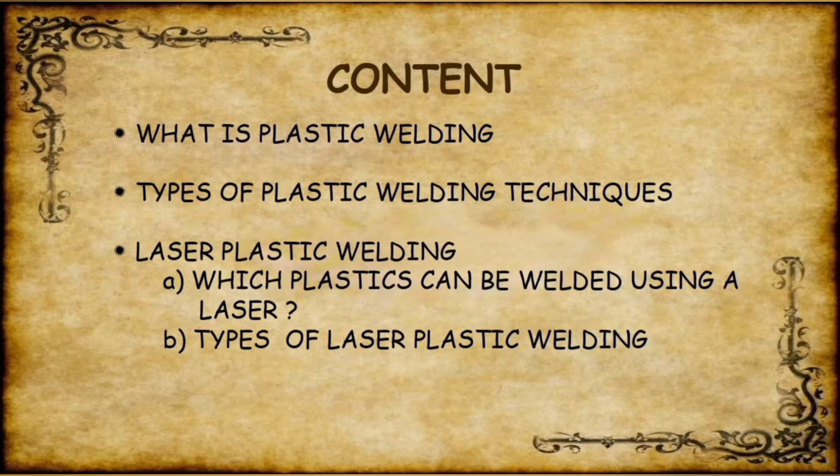Hi, I'm Nitin. Today we'll be learning about the application of lasers in plastic welding. We'll be going through what plastic welding is, types of plastic welding techniques, and we'll be concentrating on laser plastic welding, which type of plastic can be welded using a laser, and the types of laser plastic welding.

What is plastic welding? Plastic welding is a process of creating a molecular bond between two compatible thermoplastics. Welding offers superior strength and reduces cycle time. In plastic welding, heat is applied through convection of the pincher tip instead of conduction.

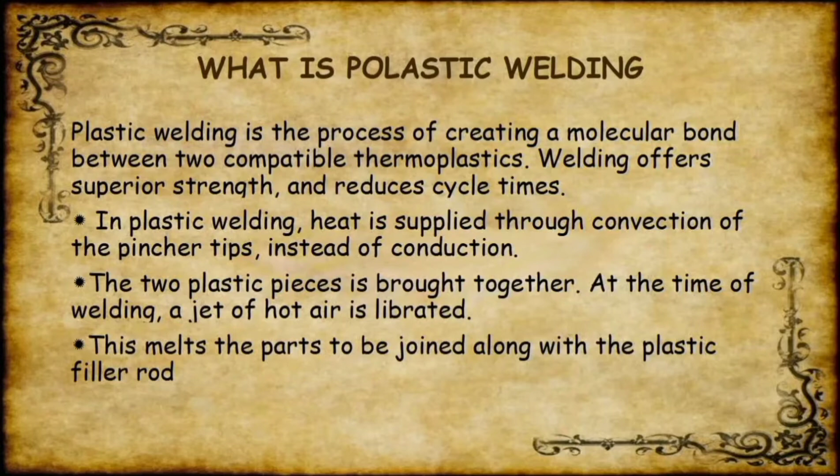The two plastic pieces are brought together at the time of welding. A jet of hot air is liberated. This melts the part to be joined along with the plastic filler rod. There are three main steps to any weld: pressing, heating, and cooling.

Plastic welding processes are primarily differentiated by their heating methods. The application of force and allowance for cooling are mechanical considerations, which may vary from machine to machine within the general process category. There are several methods of plastic welding.

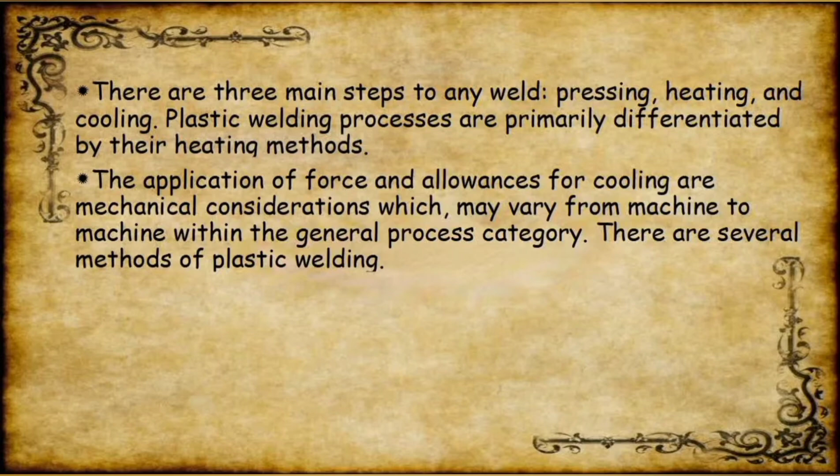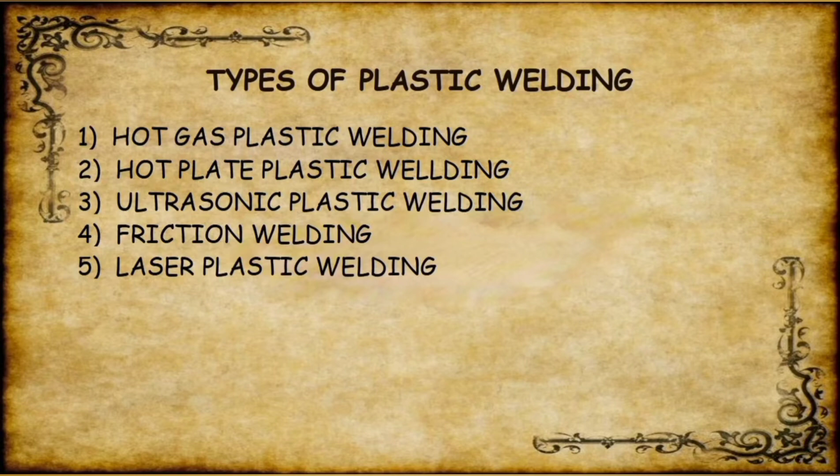Now, the types of plastic welding: hot gas plastic welding, hot plate plastic welding, ultrasonic plastic welding, friction plastic welding, and laser plastic welding. Now we'll see what laser plastic welding is.

When laser welding plastics using the transmission welding method, two types of thermoplastics are joined with one another. The laser passes through the transparent mating part, and the absorbing mating part is heated. The absorbing plastic melts the transparent joining area.

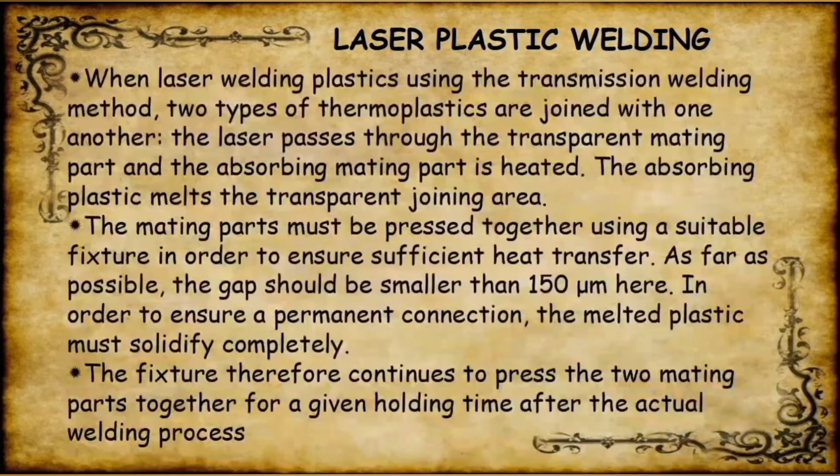The mating parts must be pressed together using a suitable fixture in order to ensure sufficient heat is transferred. As far as possible, the gap should be smaller than 150 μm here. In order to ensure a permanent connection, the melted plastic must solidify completely. The fixture therefore continues to press the two mating parts together for a given holding time after the actual welding process.

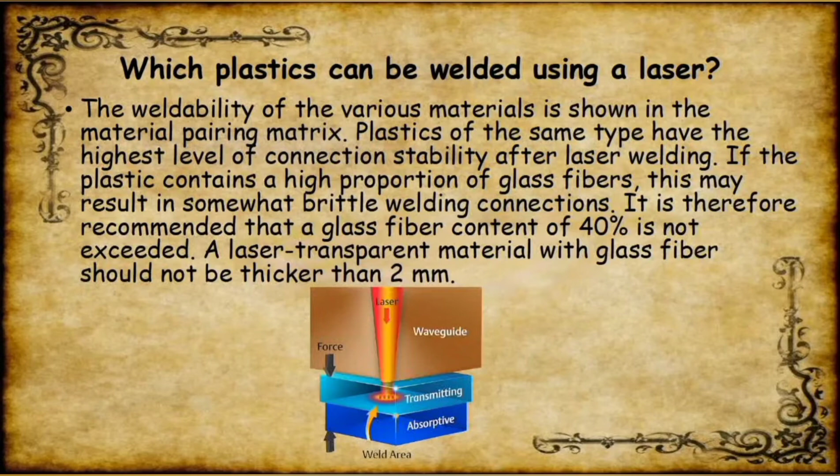Which plastic can be welded using a laser? The weldability of the various materials is shown in the material pairing matrix. Plastics of the same type have the highest level of connection stability after laser welding. If the plastic contains a high proportion of glass fiber, this may result in a somewhat brittle welding connection. It is therefore recommended that a glass fiber content of 40% is not exceeded. A laser transparent material with glass fiber should not be thicker than 2 mm.

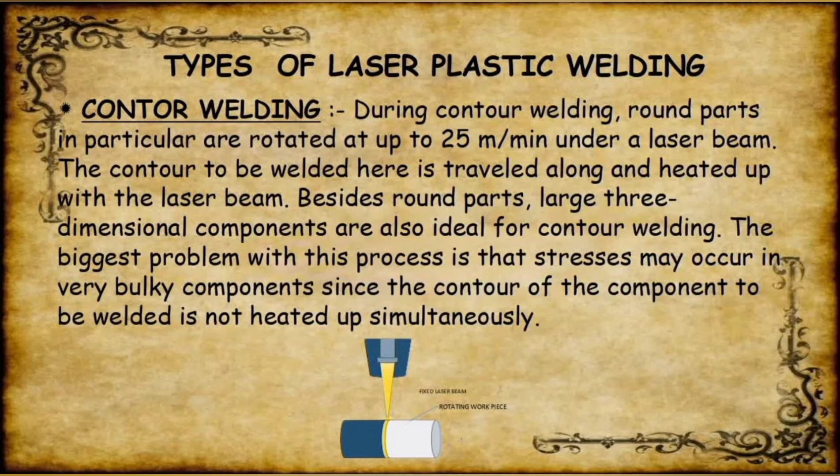Types of laser plastic welding. Contour welding. During contour welding, round parts in particular are rotated at up to 25 meters per minute under a laser beam. The contour to be welded here is traveled along and heated up with the laser beam. Besides round parts, large three-dimensional components are also ideal for contour welding. The biggest problem with this process is that stress may occur in very bulky components since the contour of the component to be welded is not heated simultaneously.

Simultaneous welding. In the case of simultaneous welding, the laser beam is formed so that it adapts optimally to the component. In this manner, the contour to be welded is heated simultaneously. The result is very short process times of only around 100 ms. Components that have a low level of complexity and are produced in high quantities are particularly suitable for this process. However, if the component geometry changes, the form of the beam also has to be adapted.

Quasi-simultaneous welding. In the case of quasi-simultaneous welding, a scanning laser beam heats up the welding contour. Since the laser beam circulates at up to 15 meters per second, or 900 meters per minute, it works so quickly that the contour is heated almost simultaneously before it has the chance to cool down. The programmable focusing optics allow you to react to changing welding contours quickly. This is a clear advantage compared to simultaneous welding.